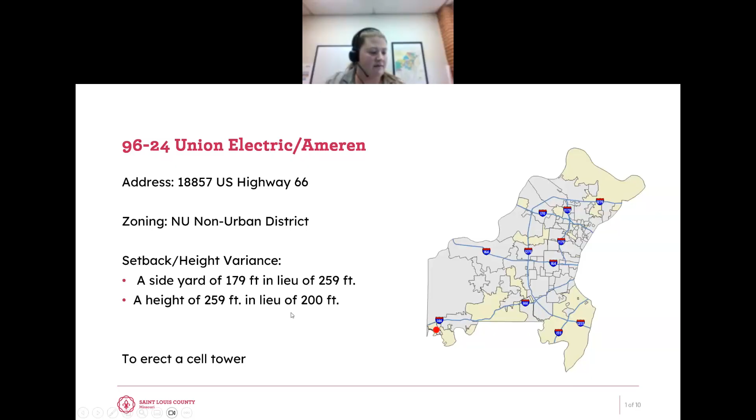Good afternoon. My name is Russell Bean. I am with Selective Solutions. Our address is 340 Marshall Road, Valley Park, Missouri, 63088.

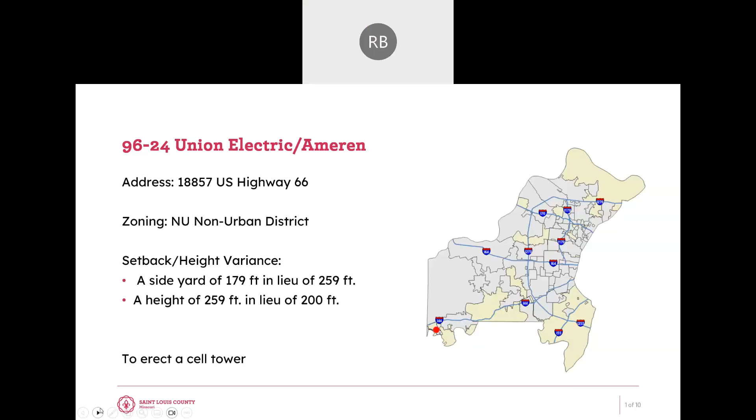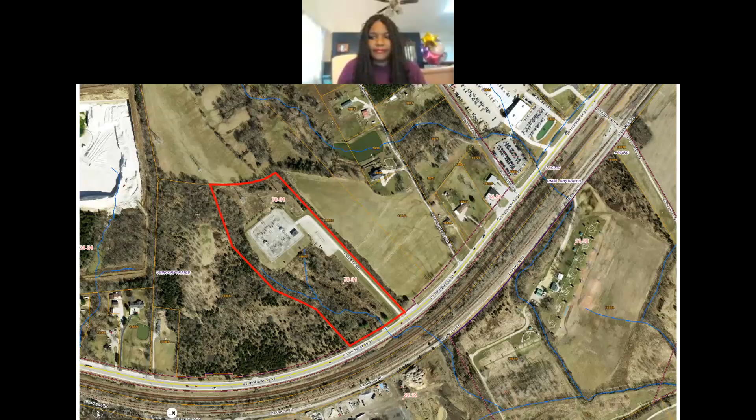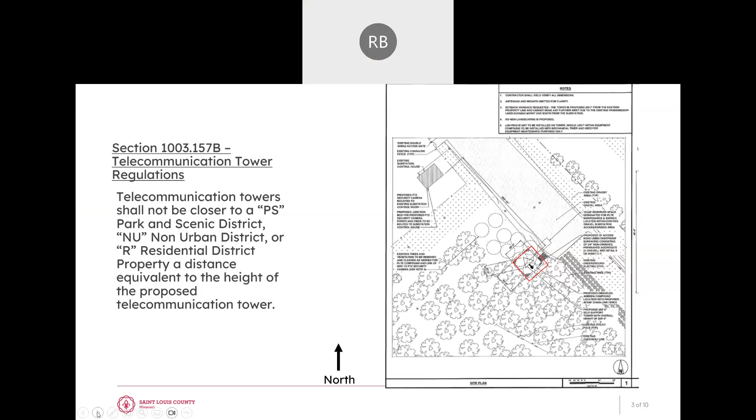Please state your case. I'm here before you this afternoon. Ameren UE is constructing a private LTE communication network. The basis for this network is monitoring their power production network and meters. There are 42 towers being built throughout St. Louis, Jefferson, Franklin, and St. Charles County areas in order to reach the coverage objective of the site.

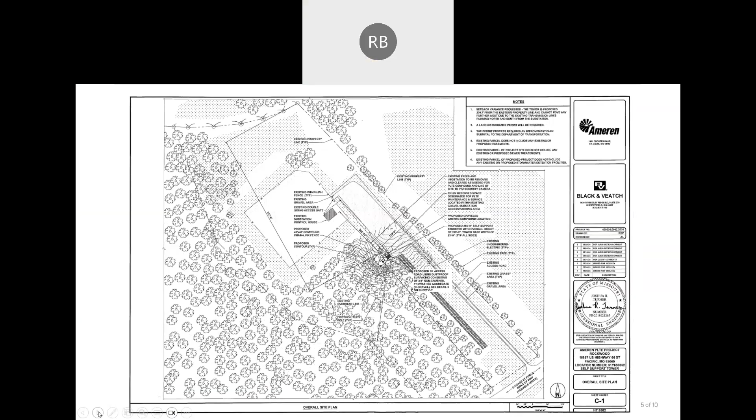Ameren at this location required a 255-foot tower with lightning rod, for a total of 259 feet. Due to the topographical nature of the property, the unusual shape of the property, and the locations of the existing high tension transmission lines, in order to fit the tower on the property we are required to request a setback so we can locate it to the eastern side of the high tension power lines.

Okay. Are there any questions? I don't believe I have any right now. I think I do as well.

Is there anyone here in favor or opposition? I don't see any hands, so at this time I'm going to mute the petitioners so the board can take a vote. This is 96-24. In the matter of 96-24, I vote to approve the variance as advertised. Second that motion. All those in favor? Aye. Aye. Aye. None opposed. The motion passes.

Moving on to 101-24, Francis and Cindy Fujarski request an exception to allow construction of a 36-foot by 56-foot detached garage and maintain the existing building, with an overall 2,208 square feet of aggregate detached structures, which is more than half of the footprint of the primary residence at 12805 Bellefontaine Road, as required by Section 4 of the R2 Residence District Regulations of the St. Louis County Zoning Ordinance. As the board may have seen in their packet, the property owner is still working on getting a revised plan for the board.

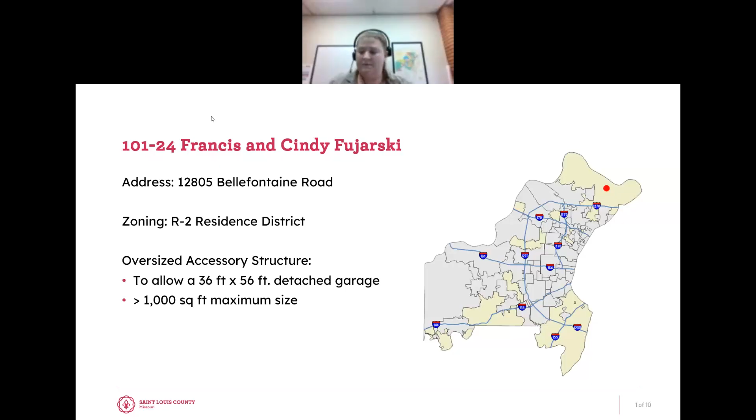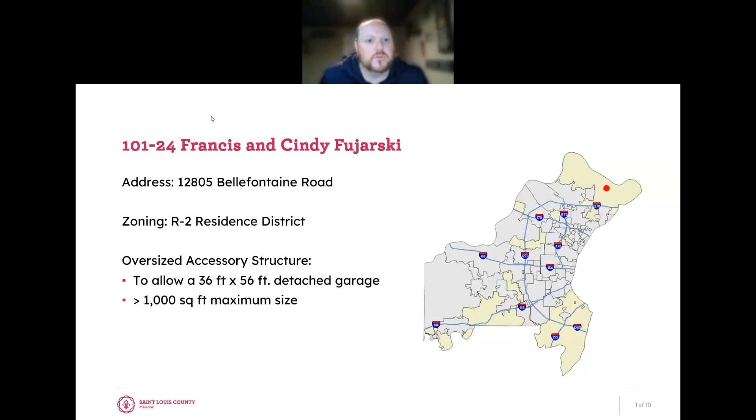What number is that? This is 101-24. Justin, did you want to take that? Sure, based on the staff's recommendation, I recommend to continue 101-24. Second that motion. All those in favor? Aye. Aye. The motion passes.

Moving on to 103-24, JVP Rentals is a request for an exception to the front yard regulations for the purpose of replacing stairs at 9449 Kirchner Avenue, maintaining a front yard of 6 feet in lieu of 20 feet as required by the R5 Residence District regulations of the St. Louis County zoning ordinance. John, I'm going to request for you to unmute. Please state your name for the record and then proceed with your petition.

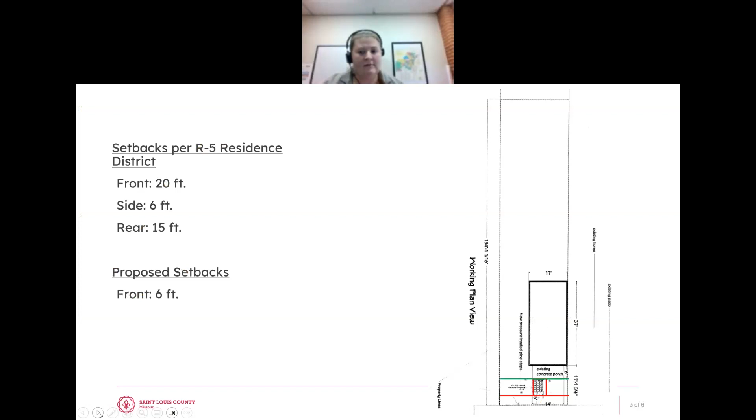John Vanderplume, I'm the owner of JVP Rentals. Can you guys hear me? Yes. That's basically what we're trying to do, is get a variance for the front steps. The front steps have always been like that. There are a couple houses on the street too that are built the same way, and we're just looking for a variance for the setback so we can redo the steps so they're in the same spot as they've always been.

For the setback off the street. And it appears with these photos that there's a lot of similarities up and down the street. Yeah, and all that stuff in the front yard from those pictures, that's not trash. The neighbors actually decorated the house for Halloween, so that's what all that is. Just so you guys are aware. I told them they could.

And just for clarification, I believe you stated it, but the dimensions will remain the same as existing. Correct, yeah, we're just building them exactly how they were. Nothing's changing on that aspect of it. I have no other questions.

Is there anyone here in favor or opposition? I don't see any hands, so at this time I'm going to mute the petitioner's representative so the board can take a vote. This is 103-24. I make a motion to approve the variance citing the need for safety issues to rebuild the stair in its existing location and dimensions. I second it. All those in favor? Aye. Any opposed? The motion passes.

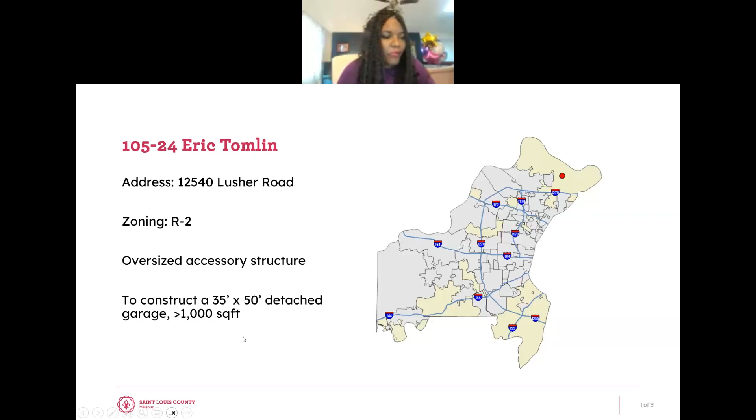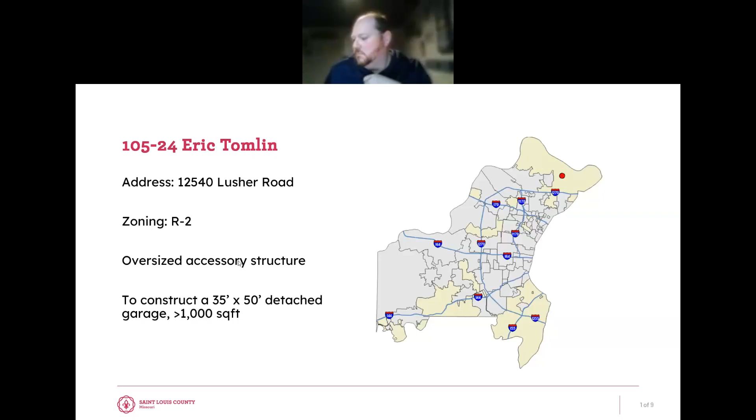Eric, if you are on the call, could you please raise your hand? I don't see you in my list. I don't see the petitioner, so if the board would like to move to have him go to the end and we can see if he jumps in later, that would require a vote to do so. I'll make a motion to move 105-24 to the end of the agenda. Second that motion. All those in favor? Aye. Aye. Motion passes. All right, thank you.

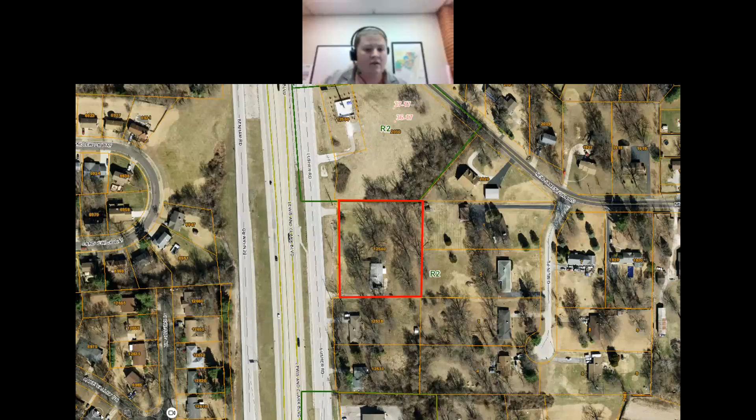All right, we will then move on to 106-24, Erik Marler, which is a request for an exception to allow the construction of a 27-foot by 33-foot detached garage with an overall 891 square feet, which is more than half the footprint of the primary residence at 2650 Treston Avenue, as required by the R2 Residence District regulations of the St. Louis County zoning ordinance.

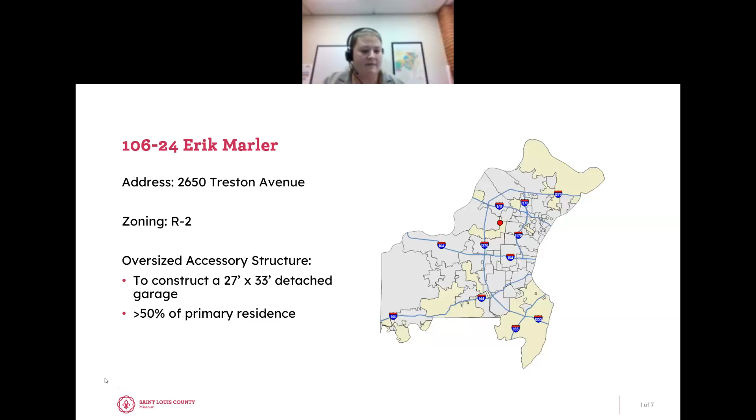There are similar structures in the area, and they're all actually bigger, so that's kind of why we were under the impression that size was allowable. We went smaller than residents or neighbors nearby. All the surrounding neighbors are in favor of it; there's no objections basically.

And what is your hardship? The housing of the boat, and the protection of my boat and my property, basically. About 6 or 7 years ago — it's a sailboat with an open cabin — some neighborhood kids were on it playing, and I was worried about their safety. We got into it with the neighbors, talked about it, and discussed that they won't do that again. But we built this basically to house it; on the right side is my sailboat, and the left side is all open.

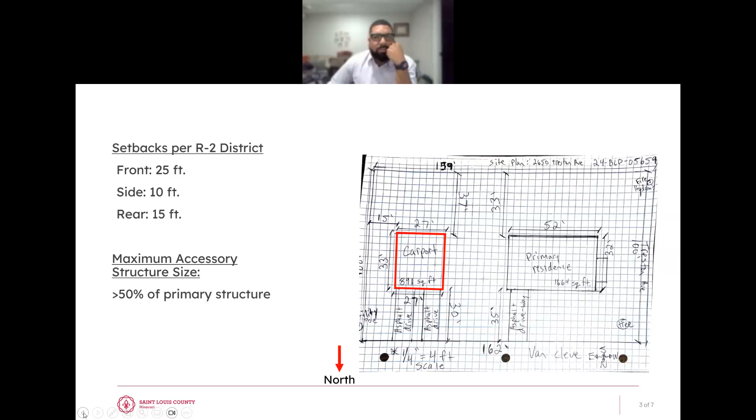Are there any other questions? Can we go back to the plan? Sure. We're 15 feet off of the line. Okay, yeah, we're plenty off the easements. Yeah, the setbacks aren't in question. Okay, I have no other questions.

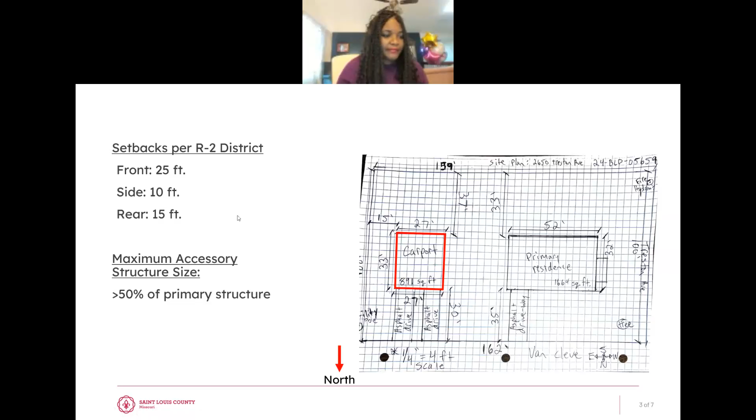In the matter of 106-24, I vote to approve the variance as advertised, with the hardship being just a need for additional shelter. I'll second that motion. Okay, all those in favor? Aye. Aye. Any opposed? Aye. Okay, the motion passes. Thank you. All right, so for the record, the vote was 2-1.

All right, moving on to 107-24, Joanna Thiessen, a request for an exception to the side yard regulations for the purpose of replacing a deck and stairs at 4910 Cyber Avenue, maintaining a side yard of 5 feet in lieu of 6 feet as required by the R5 Residence District regulations of the St. Louis County zoning ordinance.

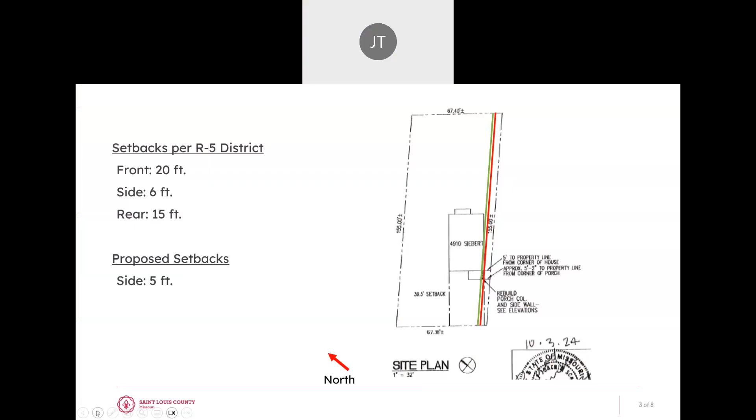What I want to do is get the house tuck pointed, and in order to fix the front porch, they're going to take it down by hand, the bricks, and put it all back up so it's straight. Anything else I need to say?

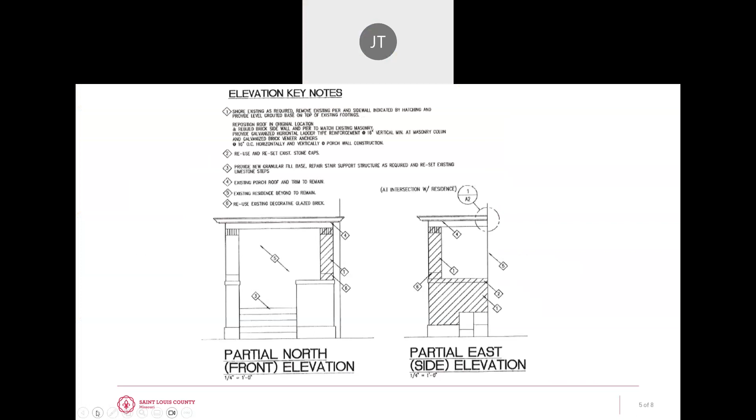Do you mind stating your hardship, just for the record? Okay, my hardship, I don't know. I don't have enough - well, the porch is tilting forward. And it's going back in the same spot, right, Joanne? Exactly, they're putting it right back. They said they're going to bring it back to like it looked when it was originally built.

Okay. Are there any other questions? I don't have any. Okay.

Is there anyone here in favor or opposition? I don't see any hands at this time, so I'm going to mute the property owner so the board can take a vote. This is 107-24.

In the matter of 107-24, based on the existing conditions, I make a motion to approve the variance as advertised. Second that motion. Okay, all those in favor? Aye. Aye, the motion passes.

Alrighty, moving on to 108-24, Rainbow Village Properties. Hold on, just a second. I was like, is that me or?

108-24 Rainbow Village Properties is a request for an exception to the front yard regulations for the purpose of installing a deck and ramp at 14426 Fox Chase Drive, maintaining a front yard of 12 feet in lieu of 25 feet as required by the R2 Residence District regulations of the St. Louis County zoning ordinance.

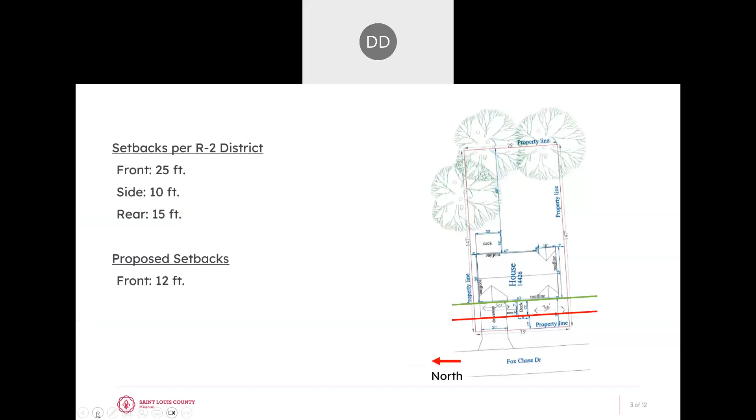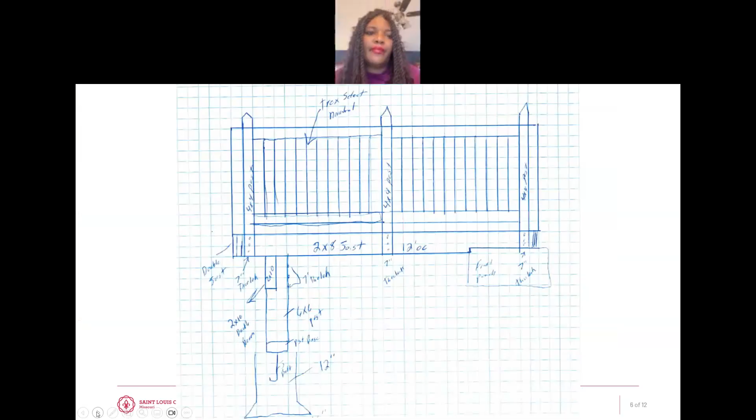They thought about putting it in the garage, but they would like to leave the car in the garage so they would not have to remove the snow in inclement weather. And the reason for the ramp is due to the fact of the wheelchair that the person, the resident, is in.

Okay, are there any questions? Just go back to the overall. Oh, okay, great, I was gonna say it's even better. Yeah, we're trying not to go out any further than that - existing sidewalk, flower bed, with I think the light post in it.

Okay, so you're creating a wheelchair ramp right there? Yes. Okay. I don't have any questions, Angela. Okay, no further questions myself.

Okay, thank you. Is there anyone here in favor or opposition? I don't see any hands, so at this time I'm going to mute the petitioner's representative. Or wait, somebody just raised their hand. I lied - all right, let me mute the petitioner's representative and then we'll unmute the citizen.

Lisa, I'm going to request for you to unmute, and then just please state your name for the record. Lisa Dickerson, there we go.

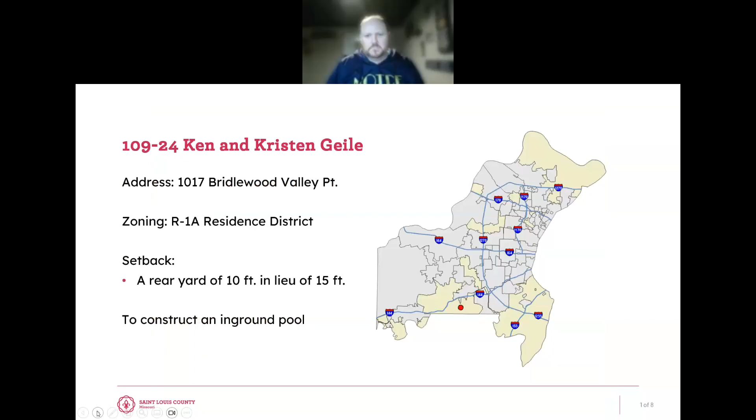109-24, Ken and Kristen Geile is a request for an exception to the rear yard regulations for the purpose of constructing an in-ground pool at 1017 Bridlewood Valley Point, maintaining a rear yard of 10 feet in lieu of 15 feet as required by the R1A Residence District regulations of the St. Louis County Zoning Ordinance and PEU Ordinance 22,656. Ken, I see you're on the call, so I'm going to request for you to unmute.

Please just state your name for the record and then proceed with your case. And you can hear me okay? Yes, yes. Ken Geile, and sorry, what else was it I needed to state? You can move forward with your case.

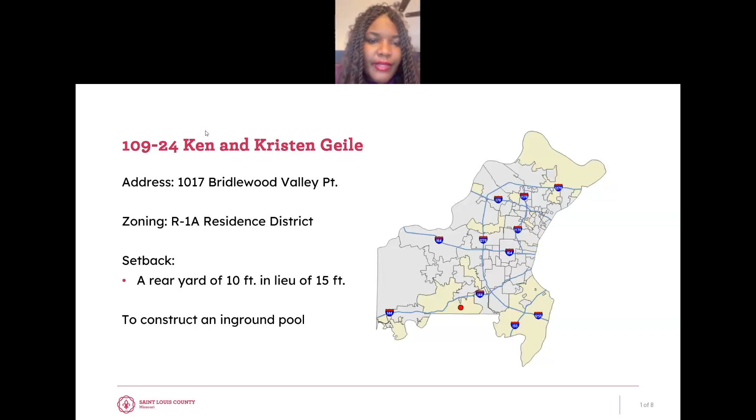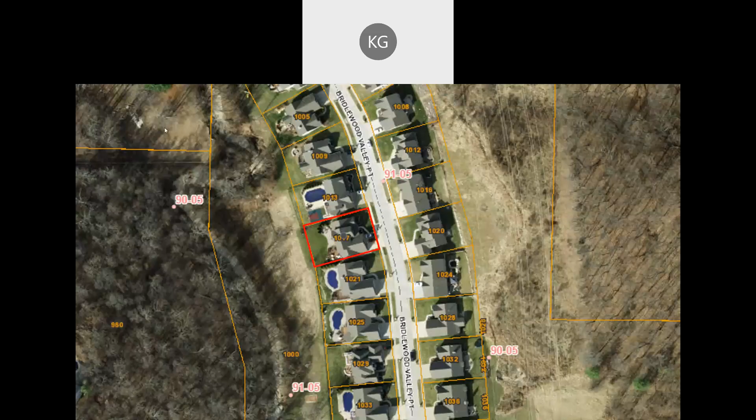You're good, okay. So this is the first time I'm doing this - I do have a couple of pictures and slides, but I thought I'd be able to share those. But I can talk to it, or is there a way that I can share? So there isn't a way to share just because it's very clunky with WebEx, but staff did go out to your site and take site photos. Good, so yes.

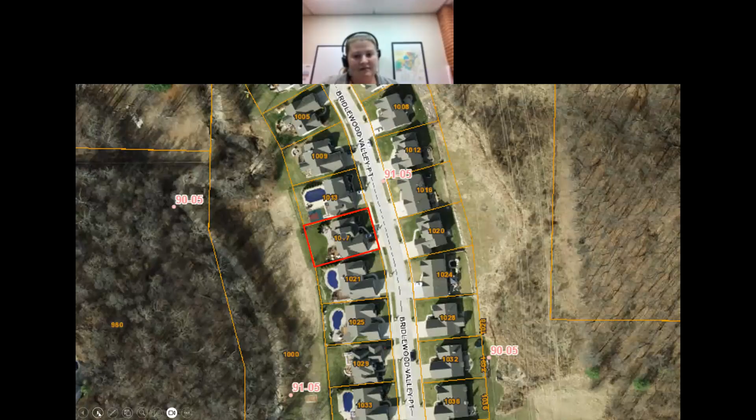So from what they would have seen then, so the hardship, you know, there's space limitations.

So in order for us to maintain 5 foot to the deck and patio from the edge of the pool, we're going to fall within 10 feet from the property line. So by having the variance to go from 15 foot to 10 foot, we'll be able to maintain that clearance and not have to cut into the existing paver patio.

Also, the concern would be if the pool gets too close to the deck, we'd have to push it forward toward the home, which would create a pretty unsafe diving board effect for kids. So we're trying to keep it back away. To do that, we'd need the rear property setback changed from 15 foot to 10 foot.

There is no impact on the surrounding area. As you'd have seen, there are no neighbors to the rear of the property. It goes off about 100 feet into woods, and there's no change requested to the side boundaries. The property backs eventually into a retention pond area with no obstructions.

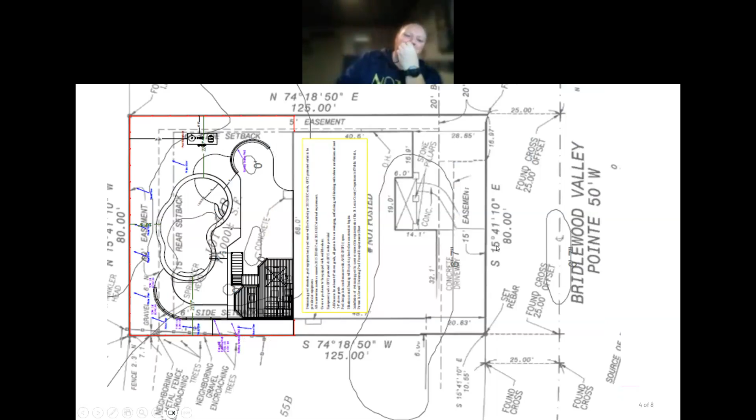So that's you. See the rounded fire pit at the top, and going more toward the rear of the yard, it will be just back to the left of the fire pit area. So on the plot plan, it would be toward the top, past toward the property line, and it'll be set back, I believe the pool company said, 6 feet minimum from the side property line.

And how close will that be to the neighbor's house? If you see where the fire pit area is, their house would be diagonal up and to the right, next to her.

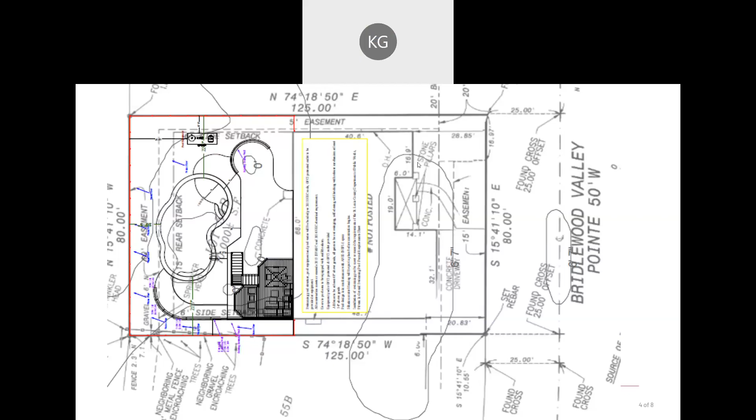Is the backdrop common ground, or is that? It's common ground. And we're beyond the easement.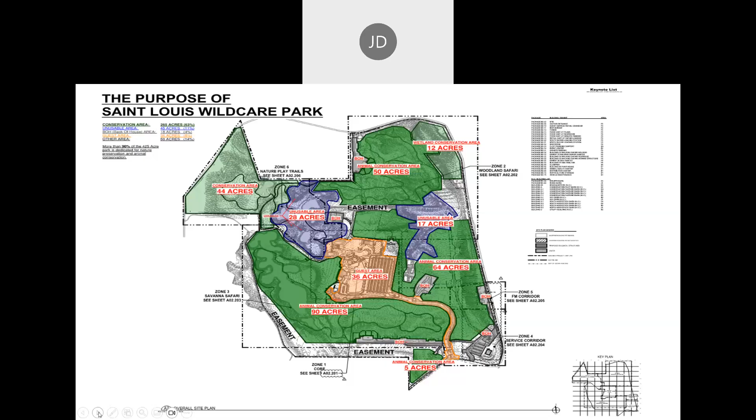I'll turn it back over to Mike, and I think in the next slide he'll talk about the existing parking lot versus the planned and proposed parking lot. Thanks, Jim. As you can see on the left, the existing parking lot—when the zoo first purchased this property and we did some master planning with different scenarios—the goal was always to use the existing parking because it met their needs, quite frankly.

But as we did a deeper dive into the zoning codes, we realized the way it was striped currently, with the concrete raised medians, it wasn't meeting the county's codes as laid out, which threw us for a loop. The current angled parking is at 60 degrees, and the curb to curb distance is around 51 to 52 feet, which more closely matches 45-degree parking than the 60 or 68-degree parking currently out there. So we tried a couple different configurations to resolve this.

When we went to 45 degrees, we didn't meet the parking counts—both the county's parking count and the team's programming parking count of anticipated visitors. Reparking it to meet code, we were 150 parking spaces short, which really wasn't what the zoo was going for. So we looked at other scenarios, but widening or increasing the parking lot went against everything we were trying to do with the conservation.

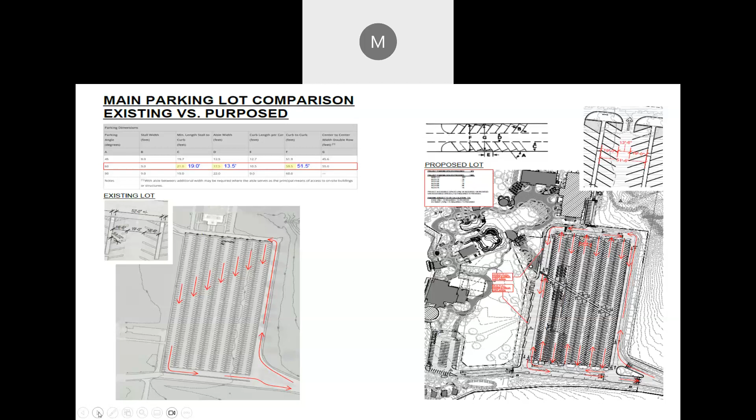So in closing, if you have any questions we'd be glad to answer them, but I'd like to thank you for your time and consideration. There's one last bit, sorry.

Are there any questions?

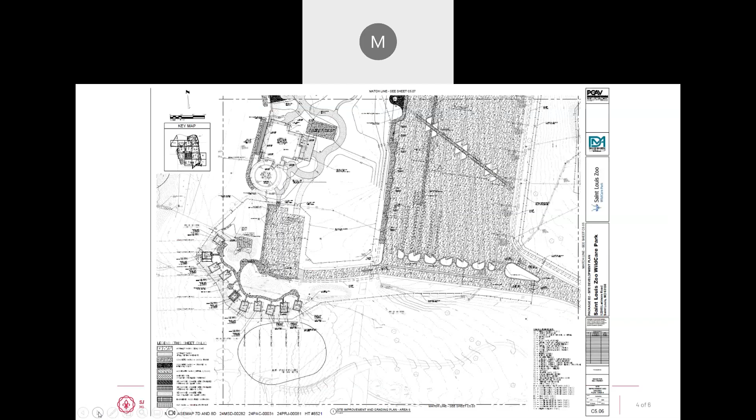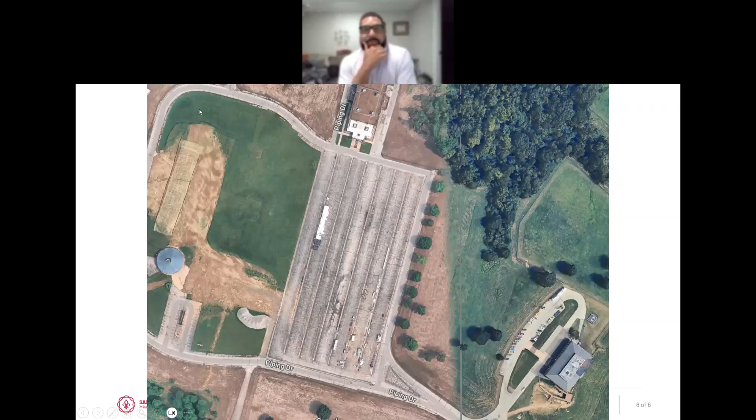I think you guys must have did a great job. Are there any questions? I have no questions, but would like to recuse myself from this vote and request that.

Is there anyone here in favor or opposition? I don't see anybody at this time, so I'm going to mute the petitioner's representatives. Also, for the board, staff did provide a staff report noting that because of the size of this project, the board has the ability to approve a variance for more than the 6 months allotted, for as long as the board wants. So staff is recommending, if the board chooses to approve this variance, that it be expanded out for 2 years to obtain the necessary permits.

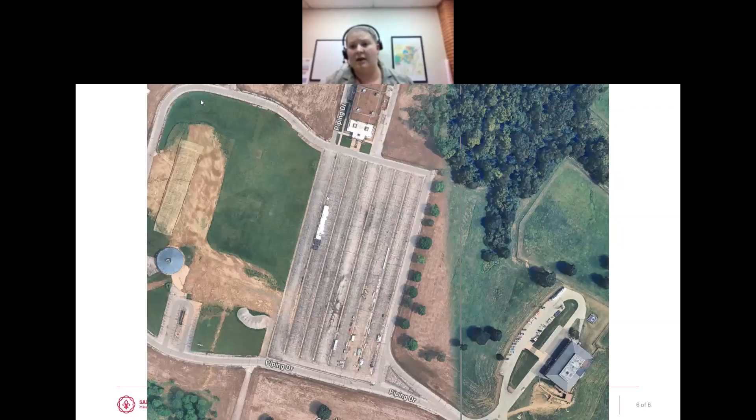Can we go back to the original slide? I'm trying to figure out, so there's two different variances, right? Yes, that is correct. It's for the drive aisle width, and then for the parking stall length.

Can I ask the petitioner, if the board was willing to grant this, is the 2-year period long enough for them? Let me get Mike and Jim back on here, they might be able to better tell you, just because they've been working with the Department of Public Works more on permitting. Jim and Mike, I've requested for you to unmute again.

Sure, yeah, we believe 2 years is enough, just given the time frame. Jim, am I allowed to say when the park is supposed to open? Yeah, I think that's actually public knowledge.

We're looking to have animals out there for over a year before it officially opens. As Jim mentioned earlier, there are already some animals out there, but we'd like to have all the animals out there at least a year before it opens publicly, which will be in the spring of 2027. So we'll have all the animals out there in 2026, and we don't want a lot of construction going on at that time so they can get acclimated to the site. We'd hope construction is almost complete in the next year and a half to 2 years, so yeah, 2 years should be plenty.

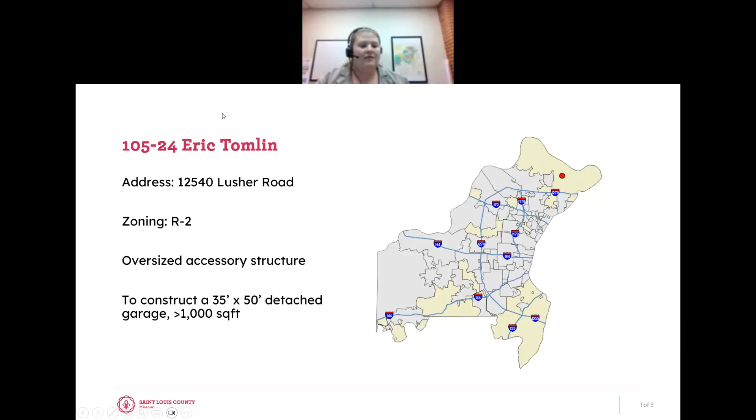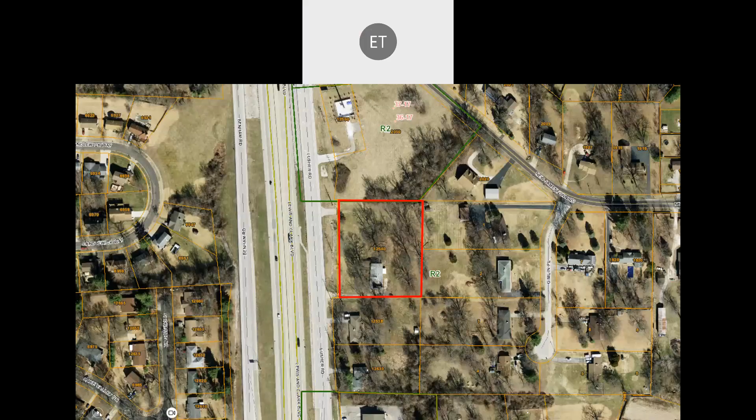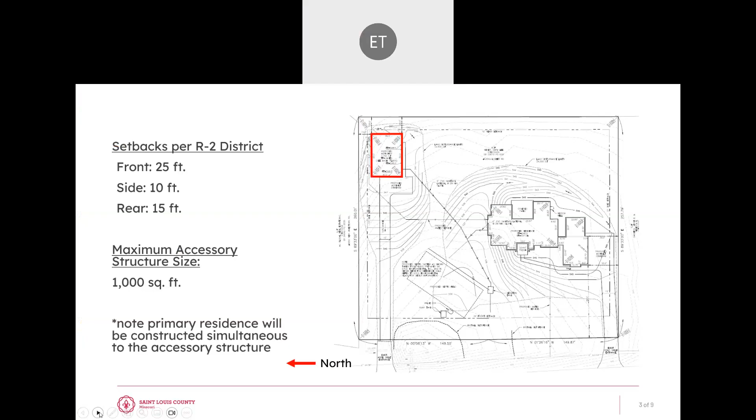Please state your case. I'm trying to get an oversized garage to store my RV and lawn equipment, etc. Being on such a main drag there, I would like to have my stuff out of sight. The actual building is 1,700 or so square feet, and the house footprint is 5,310 square feet.

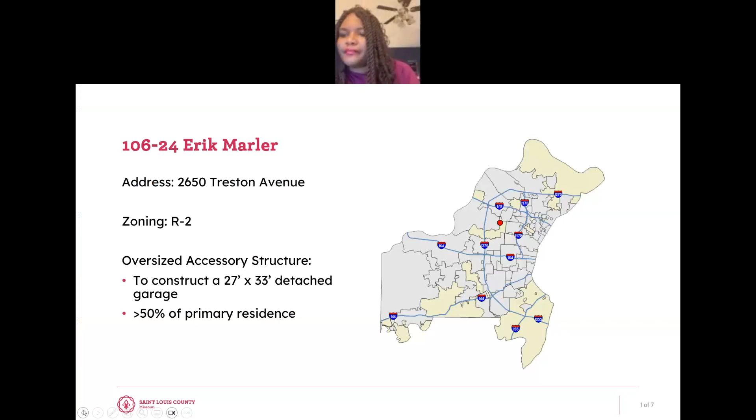And how is he for lot coverage? From my understanding, lot coverage was not in question for this. And just for clarification, your hardship was the size of the equipment you're looking to store, your RV, or is there a separate hardship? I didn't hear it stated. Just to have my RV inside, out of the weather also.

And is the lawn equipment used for maintaining this sole residence? Sole residence, yeah.

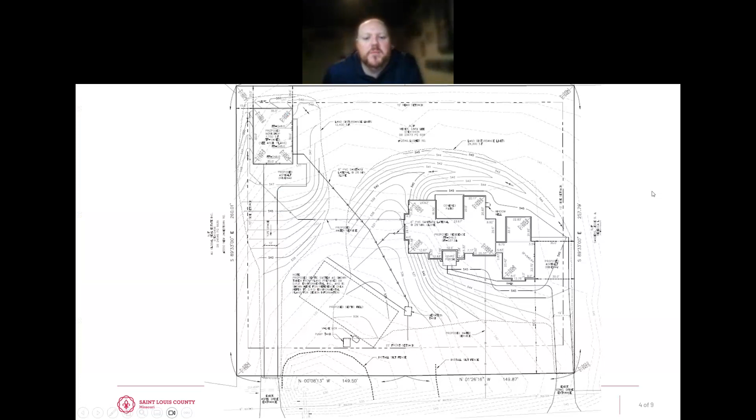Mr. Tomlin, how large did you say your house was? It's 5,310 square feet. So the staff, this footprint - there's a code that says the max allowed is 1,000 square feet. Is that correct? Yes, that is correct. Per the zoning enforcement officer's interpretation from 2017, a detached structure can be no more than 1,000 square feet, which is why it doesn't trigger the more than half the footprint of the home, but it does trigger this second thing of over the 1,000. Got it.

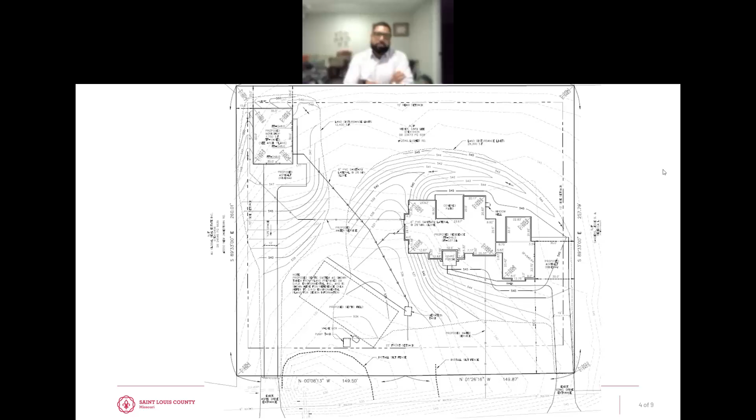I have no other questions. Okay, is there anyone here in favor or opposition? I do see a hand raised, so at this time I'm going to mute the petitioner so we can hear from the neighbor. Miss Diane, I'm going to request for you to unmute. Please just state your name for the record and then proceed with your comments.

Thank you. Diane McGee, and I just have a quick question. As far as the oversized garage, if you're facing the property, it's going to be on the left of the property. Basically, I guess, perpendicular to Lusher Road, not going the same direction as Lusher Road, right? It's perpendicular.

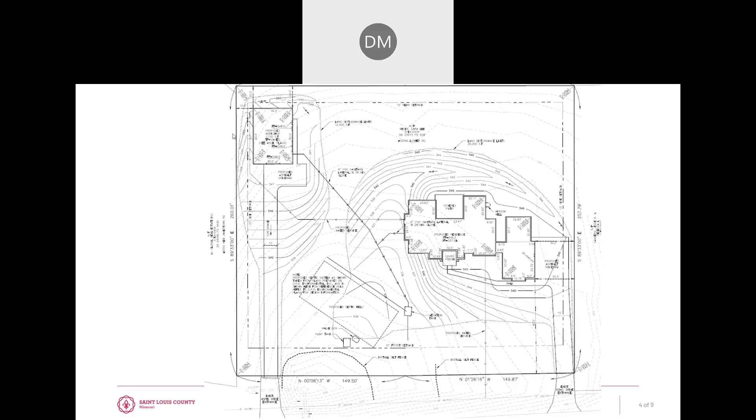So I can answer that from staff's perspective. When you're looking at that site plan, Lusher Road runs along it. When you're looking off of Lusher Road, the proposed location is that top left corner. But the front entrance would be, you would drive up the existing driveway. So yes, you are correct, but it's also, you'll still be able to see it from Lusher. Okay, thank you for the clarification.

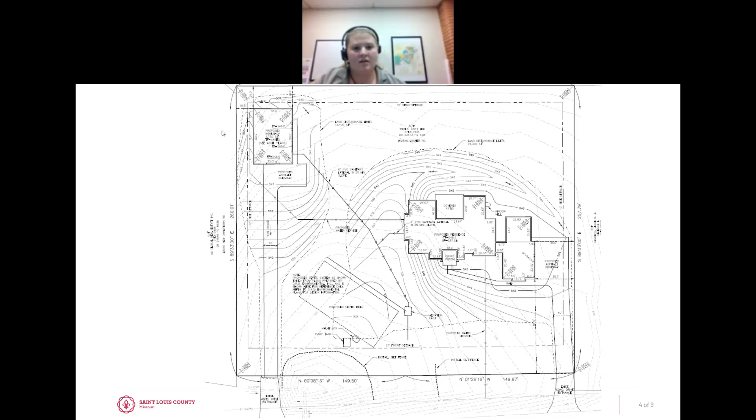Of course. Okay, I don't see any other hands. Okay, if there are no other questions at this time, we are ready to take a vote.

All right, this is 105-24. Case 105-24, I'll make a motion to approve the variance as requested, noting the hardship for oversized equipment. I second that. All those in favor? Aye. Any opposed? Okay, the motion passes.